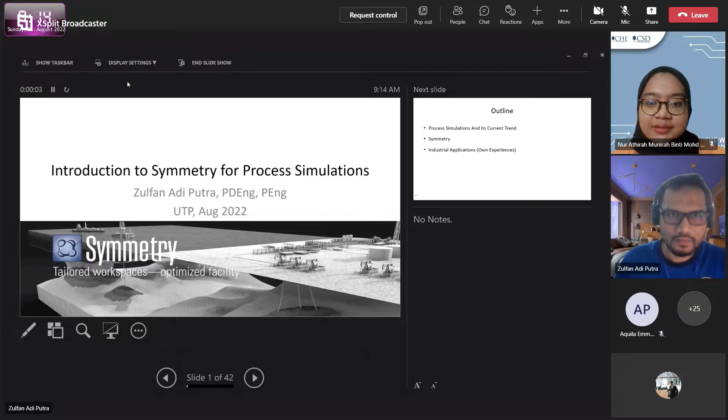Okay, so we'll discuss symmetry first. Could you please remind me, are you all final year students or third year, which one? I think they are from various years. Oh, okay, well, no problem, let's just get started. Now, what time is it now? Okay, 15 minutes.

Before we go into how to use symmetry, I'll go briefly on some things I would like to share about symmetry itself. We'll discuss process simulation - what is this, what is process simulation basically? Because some of you may already know that, some of you may not, so let's just set some ground basics.

Then I will share something about what symmetry is, and my own experience using symmetry for industrial applications. Mind you, I've used symmetry for the last 6 years or so, since 2016. There are many other things I did before that year, when it involved simulation, modeling, or optimization - I used different software. So some of those applications I will not be sharing here, because here we are discussing symmetry, not process simulation in general.

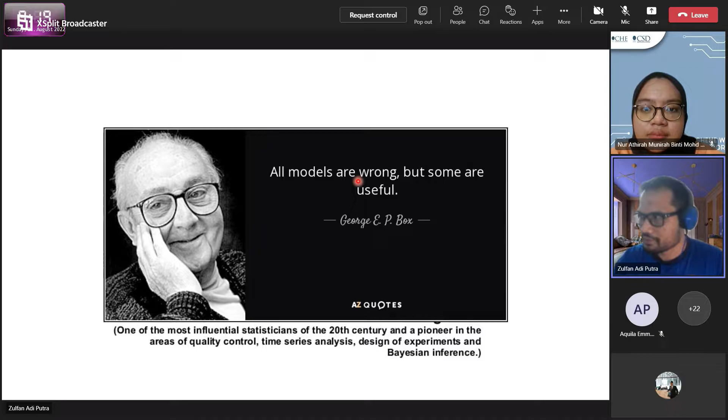So why do we do process simulation? There are several things why I do process simulation — the most common ones for you and also for us chemical engineers. Number one, we use the process modeling or process simulation software to calculate mass and energy balance.

So from this mass and energy balance, we can do all sorts of things. Number one, primarily, is to do equipment sizing. So we size the equipment. From that mass and energy balance, we have several cases, and then we can size how big is the pump, how big is the exchanger, how big is the vessels and reactors, and so on and so forth.

And then typically, once we have that mass and energy balance model, we can use that model to find some root cause of a problem. Say, for example, you're giving this input as much as you can, but you don't get the output as expected. From that model, you make the model of your plant, and you can see why it's not behaving as expected. Then maybe you can see there are some losses somewhere, which you can quickly identify once you have the mass and energy balance model. If you don't, you have to work really hard to walk around the plant, ask the operators, get some data, and then find if there are any losses.

But that's one thing we can use the process simulation model for. And once we know that, obviously we can then improve the performance — we can increase the yield, we can minimize the losses by tweaking some of the valves on the plant. And how do we know that? We could see that by doing some sensitivity analysis on the model itself. So say, for example, I increase the flow rate, I increase the duty, or reduce some pressure, and then you might see something.

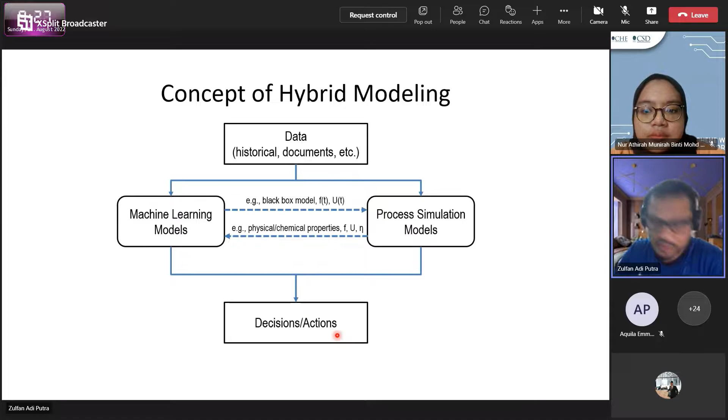This is what I mentioned. So this is what's in the hybrid model, unit operations capable of handling neural network models, and that one as well. It is integrated with typical first principle models, like we have a flash, pumps, heat exchangers, and so on and so forth.

Now Symmetry. What is Symmetry? If you know HYSYS, so Hyprotech, same founding fathers with Symmetry, but Symmetry is using Microsoft Visio. So if you know how to use HYSYS, you could then know how to use Symmetry without knowing it. It's just that visually it looks more beautiful because it has this Visio and stuff.

It's now under Schlumberger, so this product is now streamlined with the other Schlumberger products. So you can then make a model from your reservoir to the well, to the topside pressure, topside facilities, and then up to your onshore facilities, up until the flare. So you could basically model the whole facility from the ground up until you dispose it.

So you can do so theoretically. Practically that's a different story. And then they have more elaborate thermodynamic models compared to HYSYS, because HYSYS stopped thermodynamic modeling development when they were bought by AspenTech. Symmetry is continuously updated, so you could model more and more systems using Symmetry as opposed to HYSYS.

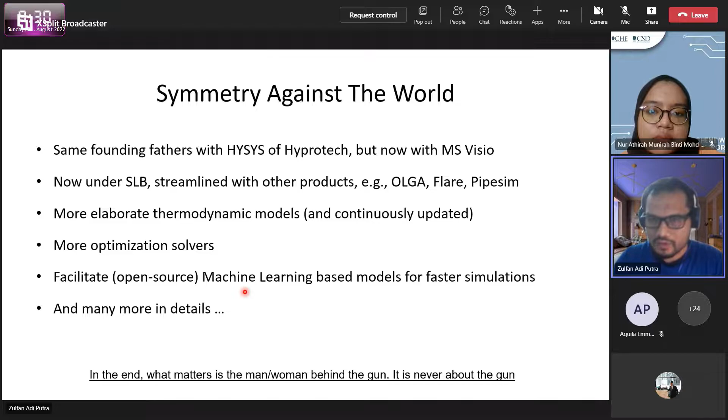So what I like and don't like, there are a few things. I'll go quickly on this. Thermodynamics, as I mentioned, in Visio, open platform for machine learning models, and robust neural network deployment related to the machine learning model. There's a flowsheet convergence window so we can prioritize the recycling loop. The user interface is clean and straightforward, and you can use the same flowsheet to make a steady state model and also a dynamic model, just like HYSYS.

But we cannot do so in Aspen Plus. In Aspen Plus, we have to export the steady state model, and then open that exported steady state model in Aspen Dynamics, and then fine tune it. So it's not that easy a transition. There are a lot of optimization solvers, many options for pressure drop correlations as well. Then controllers can be easily configured, just like HYSYS.

But what I don't like about this is that, like I mentioned, I like Aspen Plus thermodynamic models much more. There's no shortcut distillation unit - I think in Aspen HYSYS or Aspen Plus you have the shortcut distillation unit, but not in Symmetry. And the development of your own unit operation is not as straightforward as in Aspen Custom Modeler. We can make our own operating unit in Symmetry, but it's not as straightforward as Aspen Custom Modeler in Aspen Plus.

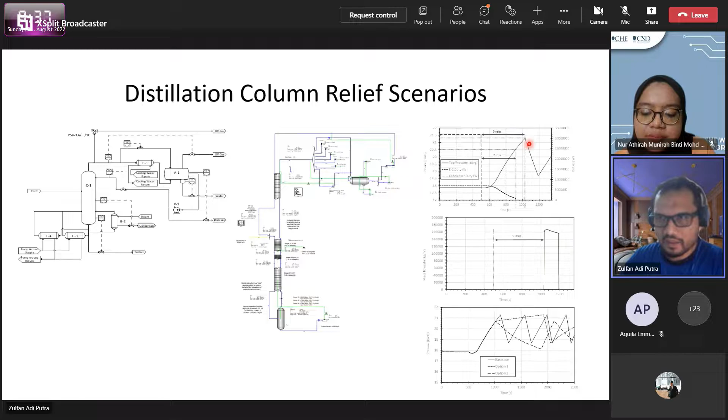Okay. Now I'll show you some stuff. This one, the rest is about the same, but I would like to show you this one.

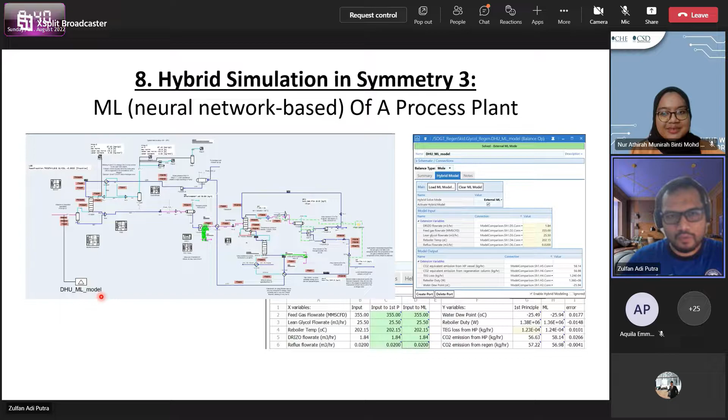Okay. I'll skip this. Yeah.

Now we have two hours or more, and I will leave another half an hour for questions and answers. Do you all have access to Symmetry?

Are you opening Symmetry now? Are you opening Symmetry or are you not opening Symmetry? No question. No, sorry, no question. No answer. Hello, hello.

You have your Symmetry now. Okay, at least I have one. You open your Symmetry, yeah, like this, and then you will see a window like this, right? Okay. Yes or no? Yes. So I assume it's yes.

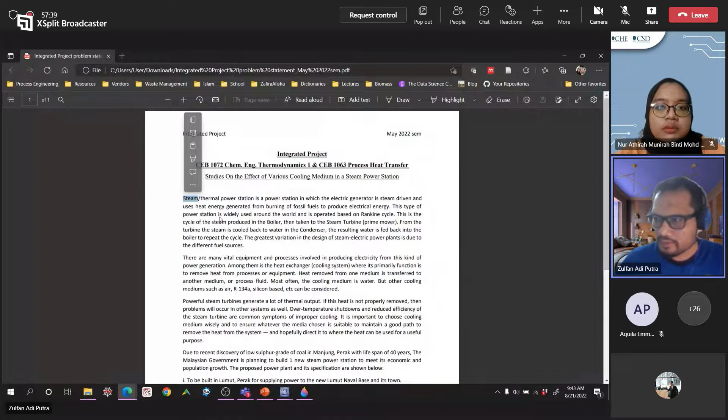From this thermodynamic model, I received from your colleague Li Jing a case about a cooling medium steam power station. So we have steam, which is basically water. Is there any other stuff? No, so we'll do water, air, and R134A. Let's add water, since this is a steam cycle.

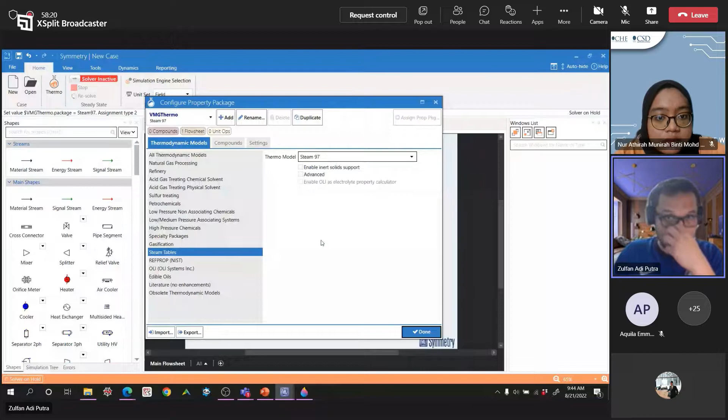In this particular case, your thermodynamic model is the thermodynamic model of water, so you could use steam tables. Pick the latest one, the Steam 97, and then the compound is basically water.

You could type and press the button once, then press it again and it will be selected. Or you could type water and double click to highlight it, then you get it selected - double click, one click, and you get water in it.

The name of your thermodynamic model is then VMG thermo, so you could name it like 'your model.' So your model is then using the Steam 97 dynamic model. Up until here, is it clear? Can you follow? Yes, good, and then you click done.

If you don't want to talk, it's also fine. Just say yes or no.

Now we have the thermodynamic model, and we know how to select the components we need. The next step is the unit sets - depending on which unit system you're familiar with. Here we're more familiar with SI units, so that's the units we're going to use.

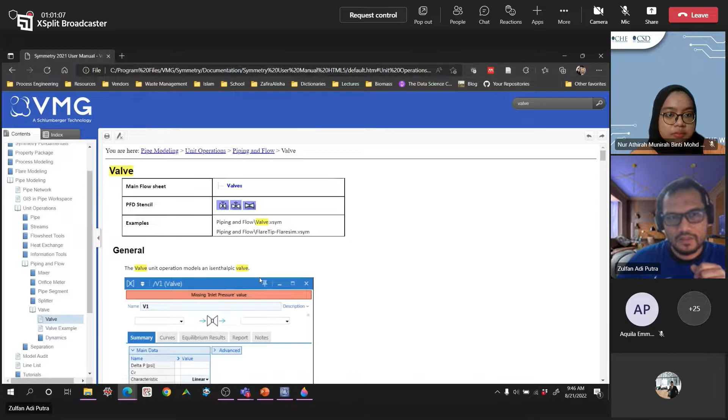You can search for things - fundamentals, process modeling, flare, and so on. For example, if you want to find something like a valve, there are 99 results. You can go to valve - when you click it, you find it under the valve directory, under piping and flow, under unit operation, and pipe modeling as well. You can see general information about the valve and an example on how to use it.

Here, if you want to go for dynamic modeling of that particular valve - the same way you can search for other stuff. I'm showing you how to do that so at least you can go ahead and find your way around this.

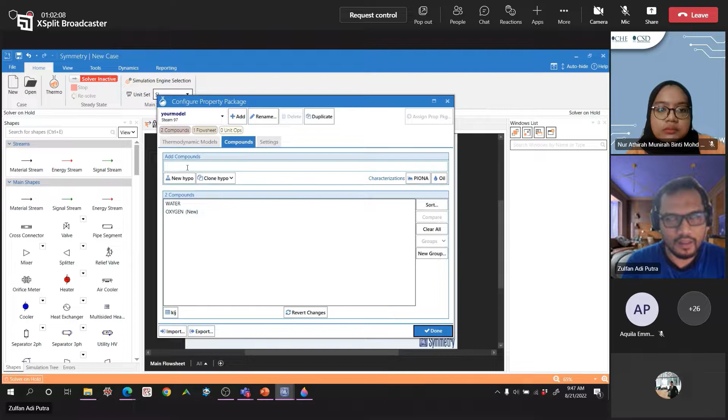That's all done for thermodynamics - one more thing. Say, for example, you miss one component - how do you get back? You can simply click on this thermo and you'll see the same window with your water. If you want to add some air - we have oxygen and things like that. Then you click done.

Say, for example, you make a material stream. Since this is Visio basically, it's just a matter of drag and drop, like you use Visio normally. If it's yellow and dotted, that means it's not solved - we need some more information. If you hover over it and then double click, you can see.

So my laptop is very slow.

Okay, so now here you can name it as you want, like stream, my stream. So you can name it, and then here we have the composition. In this case, maybe we want to have water only. The window pops up, and you can see it's small on composition, right? Then I simply enter, and then you click OK.

For example, you have another 0.01 over here, and then 0.03 over there, and you can see that this is above 1. So it's not possible to have a total of more than 100%. In this case, if you say well, this is also true, you could do normalize. It will then be normalized according to these numbers, but the total will be 100%. So if you click normalize, something like that, instead of 1 you have water like 0.96, oxygen 0.0096, and nitrogen is 0.0288, something like that.

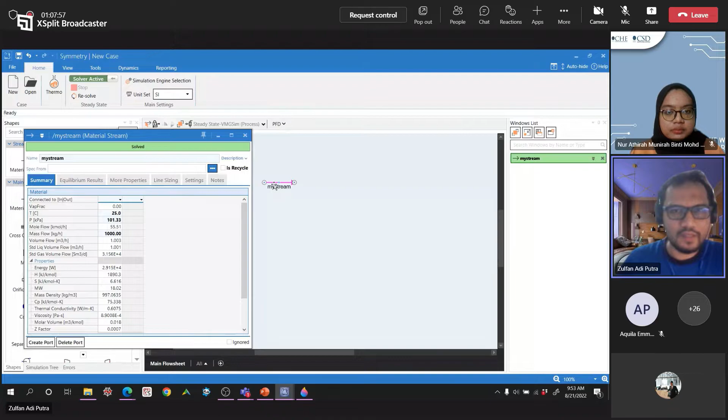And then you can see that the color changes - it was blue, now it's purple. What it means is you can go to tools, then settings, then Visio PFD, and you can see here: if it's purple, it's a liquid, which is what we have now. And if it's blue, what we had before, we have a liquid and a gas, so it's a mixed phase. If it's blue, and if we have full vapor, we have a teal color like this. You could change it, but I will just leave it like that. It's not something to memorize, but it gives you an indication that the phase may change already. So it is a help in this regard.

Do you have any questions so far? No? Okay, if you don't, then fine.

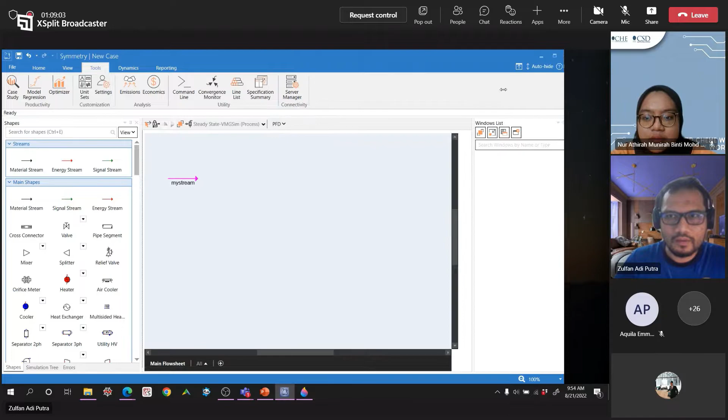So I will put it here. Just close this, I'll show you. Let's see if we can do this quickly. I'll put it side by side so that you can see it and I can see it. So small. Okay, can I do this? Okay, now.

Yeah, so this steam turbine stuff, let's read this together. The electric generator is steam driven, using heat energy generated from burning fossil fuels to produce electrical energy. So it's very inefficient from that perspective. This type of power station is widely used around the world simply because at the time people didn't know any better, and nowadays people know something better, but because it's been historically done that way, people are reluctant to change. Nonetheless, it's operated based on the Rankine cycle.

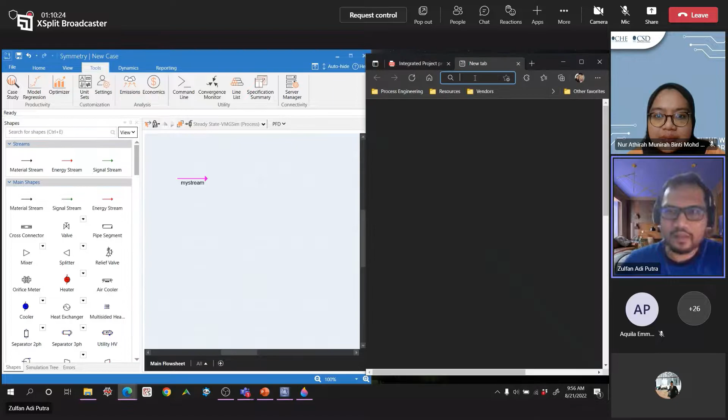So what is the Rankine cycle? If you don't know, you can Google this Rankine cycle. Or if anybody in the audience knows what the Rankine cycle is...

So Rankine cycle is... where's that stuff? This one. So we have, which one is the easier one - Rankine cycle? Oh, find picture. Nah, this one. So you have this.

So you have a boiler, and you're burning fossil fuel, right? You burn fossil fuels, and from that burning, you make your steam. So steam is produced in the boiler - you have a boiler, you're using fossil fuels in it, and you burn it.

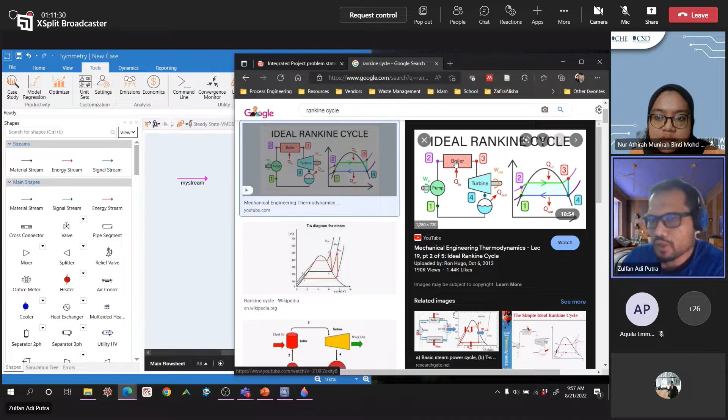The question is, well, we could model this. We could model the fossil fuel, the amount. Let's just do that for the sake of introduction. So now we have fossil fuels - what kind are you using? It's not really known, but nonetheless, let's just use...

Methane gas. In that methane gas, say for example, we forgot to put methane, right? So we add methane - click once, so you have your methane. We burn methane, and when we burn methane, we also need oxygen. We have oxygen, and then we have water, and we also need CO2. So now you have your methane, for example - your natural gas - and assume it's pure methane.

It's ambient, maybe just simply slightly above atmospheric, so you can push it towards the burner. So let's make it 2 bar, and because the unit is in kilopascal, if you put 2 bar you want to change it - you can put 200 kilopascal, or simply press space, and you'll have all kinds of units you can select from. So 2 bar is 200 kilopascal. You can also make it, I don't know, 1000 - just put a nice number.

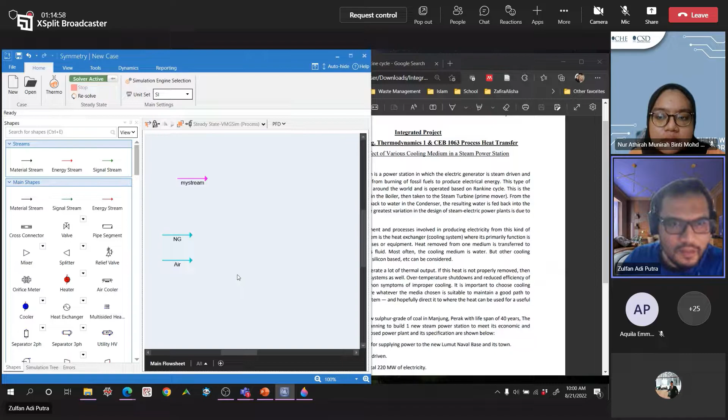Okay, so now you have air, you have nitrogen, you have natural gas. So you burn it because you need to get that heat from the burner. So how to do that? Obviously, number one, you have to mix them, right? You cannot react something because it's oxidation reactions. Just drag and drop the mixer, connect it over here, and this one over there. And then you can see it was gray - now it's dark black.

It means it is solved already. Why is it solved? Because we haven't specified anything. It's simply because there is one degree of freedom for this mixer, and it just calculates the outlet pressure as the lowest between the inlets. So we have two inlets, air and natural gas.

The lowest pressure of the two becomes the pressure here. So this is zero. In zero is the air, which is air. This is quite inconsistent, which is also what I don't like about Symmetry, because air is on top, air is on the very left, and I'd expect air also on top, not the bottom, but nonetheless it is there. So we have natural gas, and the second inlet, both are 200 kilopascals.

So this is also 200 kilopascals, and then they are mixed together. It's simply mass balancing. You can see the mass is just 1,000 plus 1,000 equals 2,000, and then the energy will also be calculated accordingly.

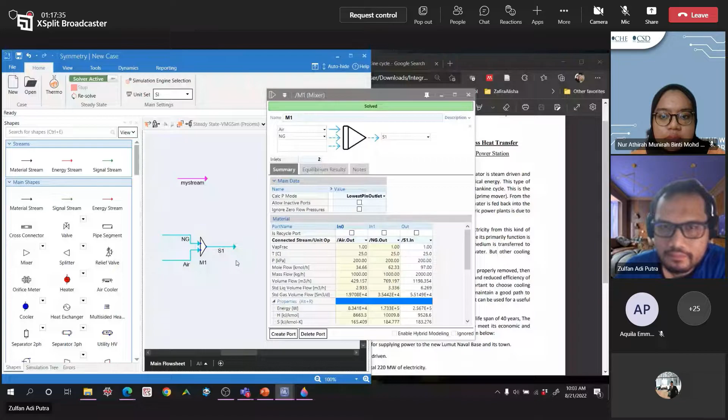So now we have the mixed air, we mixed the air and the natural gas, and now we simply burn it. That burning is an oxidation reaction, right? So if we assume it's a complete combustion, because what we care more about is the heat we're going to extract from it.

So we can go to reactor. Reactor is, yeah, you can simply get a conversion reactor like that, and then connect it there, and double click on that. From here we have to define, so it's a conversion reactor, we have to define the reaction first.

So this is oxidation reaction. Now we can go to the reaction tab and click add or edit, and then you can name it oxidation reaction. And then you can say it's methane, right? So methane is -1. Methane has 1 carbon, so it means the carbon dioxide will also be 1. Could also be 1. And then we burn it with O2, so CH4 plus O2 becomes CO2 plus H2O.

So how much is that DH? How much is DH?

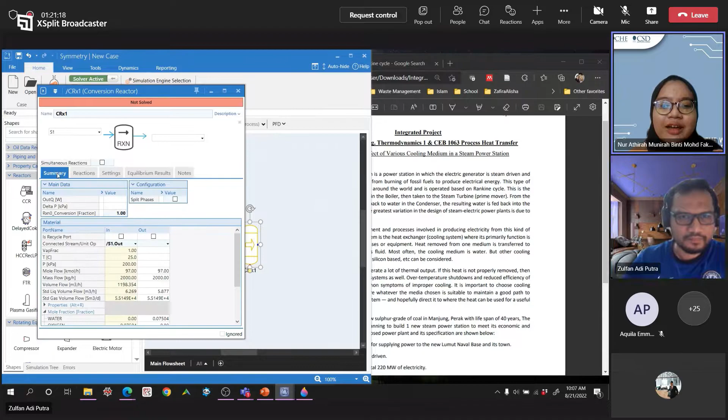Can you open the reaction tab again? So how do we decide the base component?

Is it something like the limiting reactant? How do you decide what's being reacted? The base component, so the reactant. But I think we have two reactants, right? Methane and also oxygen. So in this case, what exactly do you want to do with these reactions?

You want to, because oxygen is an oxidizer, so it will oxidize something. But you cannot methanize oxygen, there is no such thing. So if you oxidize methane, that means that methane is a base component. Mathematically speaking, you could then use oxygen as a base component. It doesn't really matter as long as it is one of the reactants. You could do so, but then from the physical standpoint...

Something is the one that is being limited, so that's the limited thing, and that is then the methane. Methane is being oxidized, that means methane is then the base component.

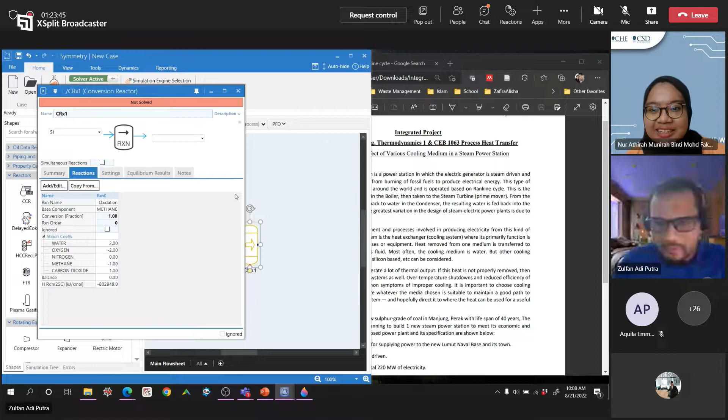I think your connection is not quite stable because I can't hear you. Hello? Is it okay now? Hello, I think it's okay now. Hello? Yes. Can you hear me now? Yes, I can hear you now. Can you not? Hello, hello. Hello, can you hear me? Yeah. You cannot hear me? Yes, I can hear you now. I will disconnect and connect again.

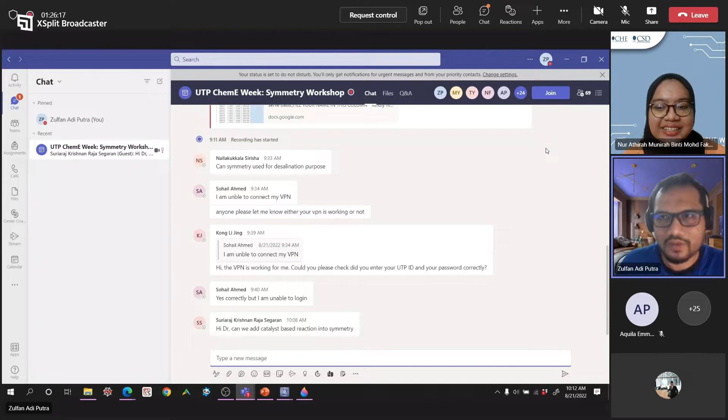In this particular case, for example, in combustion reactions or other reactions, there are several things to consider. I think that stems from the understanding of reaction engineering, basically it's not about the tool. So now let's see if I can write this.

So now you have component A, and then reactions, and A becomes B. And you can say, well, I have a catalyst over here, and during this period of the catalytic reaction, I make B from A.

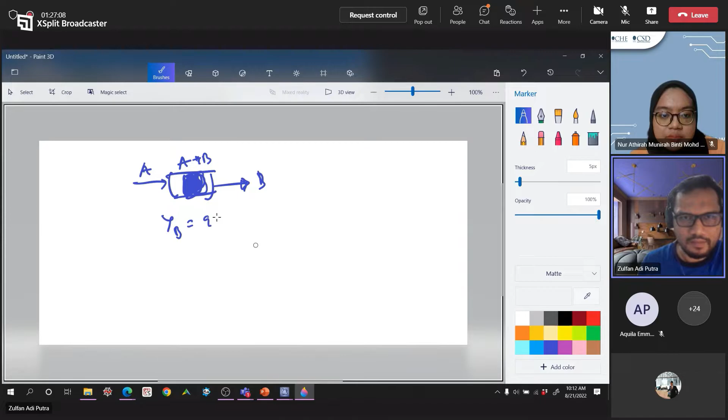So question number one is, how much B is being produced? If you know that the yield of B is 90%, that means you can simply calculate B, right? So you get your B, B is done.

And then you can come back with your reaction engineering class to say, okay, if I want to have B at 90%, I know this information from the literature, and I know how much is the flow rate of this guy, and then you can calculate how much is the volume. If you know the volume, you can calculate it, and obviously if you know the volumetric flow rate.

And the density of this guy, or you can have a mixture density, then you can simply calculate the diameter of the reactor. From these simple calculations, you know the volume, you know the length, and you know the diameter. So that's how you get your insights on the catalyst, the size of your catalytic reactor.

So that's number one. Number two is, if you don't know the yield of B, but you do have a kinetic expression...

So you have reactions of A, for example, it's minus K and then C_A to the power of 1, 2, or 3, up to you. Just make it 1 in this case to make it easier. So in this particular case you can say, I want to vary this, to have an automatic calculation.

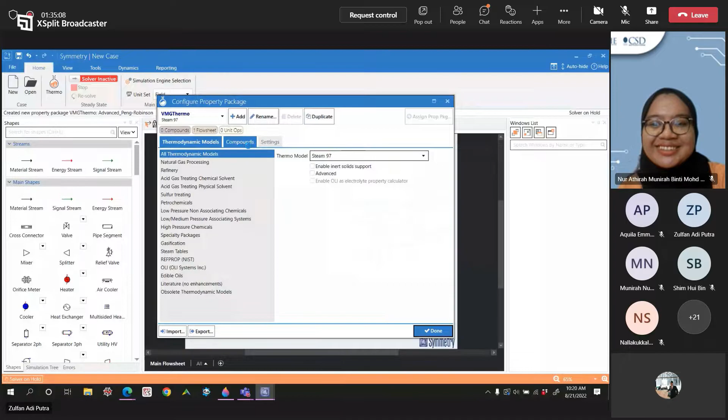Let's use this stream: water, and then you can use semicolon to select some components simultaneously. You have oxygen, methane, and CO2. So you put semicolon in between. After that, you have everything together, and you can just press once, and everything will be selected, and press another, and they're all there. Done. It's important to save your work every now and then.

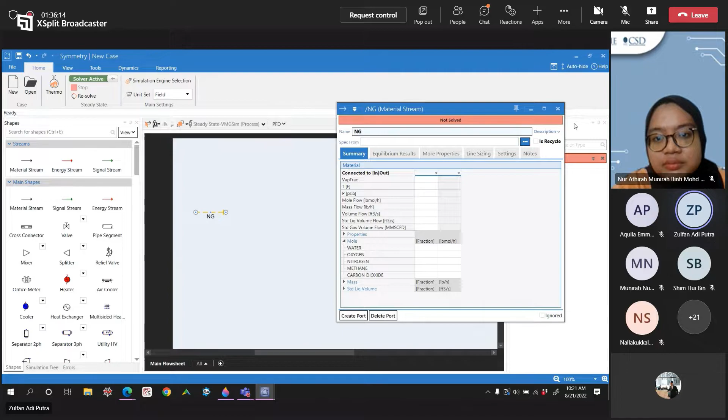So now we have natural gas. Is there any questions while I'm doing this? Or was it clear previously? So I have to make it in the... was it clear or not clear? So we have to make it.

For me, it's clear. Probably. What does it mean by probably?

Clear, and then the 1000. And then we mix them, obviously, because we want to burn them. So it's automatically solved like it was before. Okay, and then we put it there, and it goes to the reactor. Where was it? An equilibrium reactor.

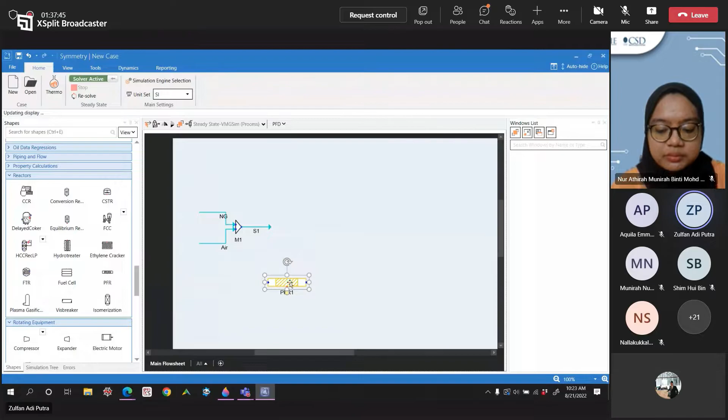If you want to use this PFR, you can, if you have the kinetics, like I explained before. If you have the kinetics, you can use this PFR, but again you need to decide on the length and diameter, and then it will calculate for you what the outlet conditions are. Once you specify the reactions, all of this kinetic data will be available.

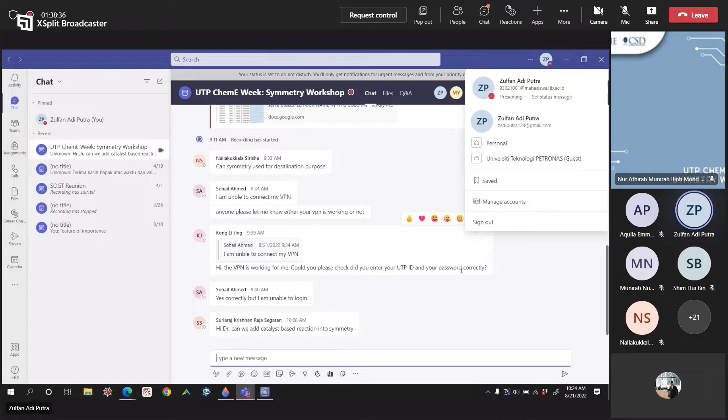Now it's empty because we haven't specified anything. But for this simple conversion reactor - for the questionnaire, the person who asked this, what's her name? Suriaraj. If you have a specific example on this, just let me know. You can write down the kinetics in the chat, and I can then show you how to do it. Just find that particular problem you're concerned with, and let's do it.

So connect it over there, and then we have reactions first: methane is -1, carbon dioxide is also 1, and then water is 2.

So conversion is 100%, and the base component is methane. So we've done the reaction. And we know that conversion is 100%, or we make sure that it's going to be 100%.

Now once we've specified the pressure drop, we need to specify what the state of the reactor is. This reaction is an oxidation reaction, which means it's an exothermic reaction, so it will release heat. That's from the reaction standpoint, but from the reactor standpoint, are we going to operate it isothermically?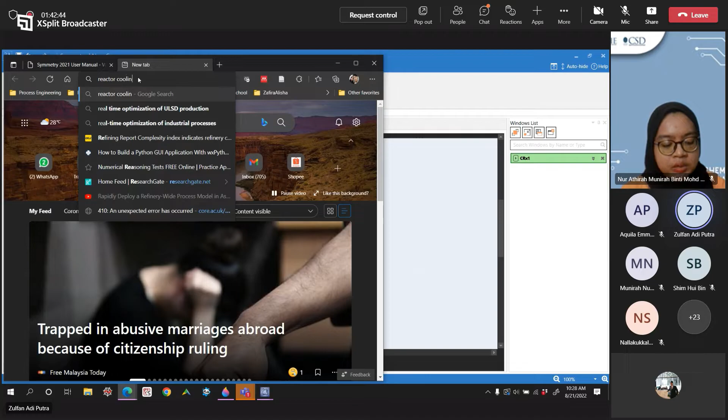So typically we have a jacketed system here, either a jacket or a coil around it. The amount of steam that we could create, we have to calculate the heat enthalpy of that particular steam at that pressure, and then use this amount of energy. Then you can calculate how much steam you can make.

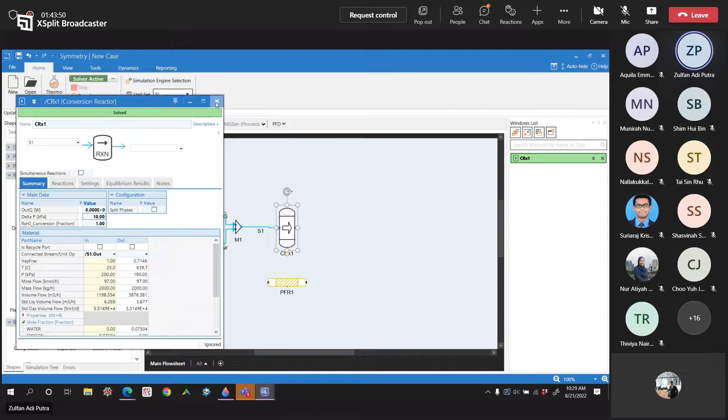For now, just keep it adiabatic. Just keep it adiabatic. And this is it, for the time being. And I'll show you, because we're going to need that heat. That heat is going to be used.

Remember this task - steam is then being produced. Sorry, the heat is not being used, but that particular heat is being used to produce the steam. You could do it 2 ways - what I said before, which is what type of steam do you want to produce? Are you going to produce a higher pressure steam or lower pressure steam? Say, for example, you want to make steam using a steam table, so if you go to the steam table...

So steam table images, like that, like this. So steam table, this is steam table block.

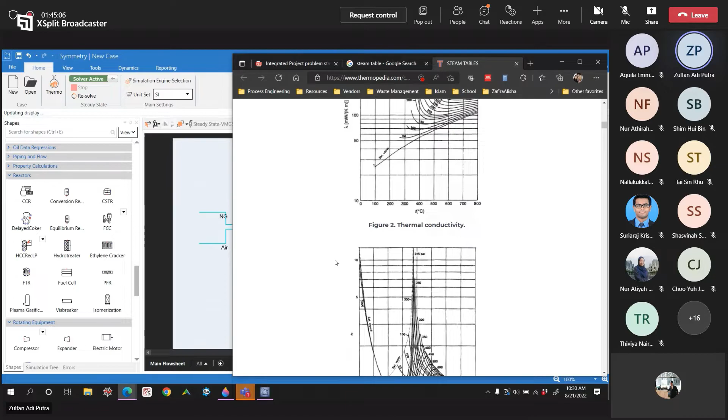So now, say for example, pressure, temperature, right? So what's the unit of P? Oh, bar, so you have bar. So for example, you have like 1 bar, 1 atmosphere over here. You have like 100 degrees C of saturated water, which is the boiling temperature of the water.

Say for example, you have this guy. Close this. So this guy, it can create up until 600 degrees C. You can see that, yeah, up until 600 degrees C.

So you could then have, depending on what you want. I'll have to put that Rankine cycle again, because it has something to do with this. It will have everything to do with this Rankine cycle.

So you can see, because it will then create steam, and this steam is going to be flowing through a turbine. The higher the pressure of the steam that you make, the more power that you could generate. So it depends on the pressure and the amount of volume, the amount of steam that you are generating.

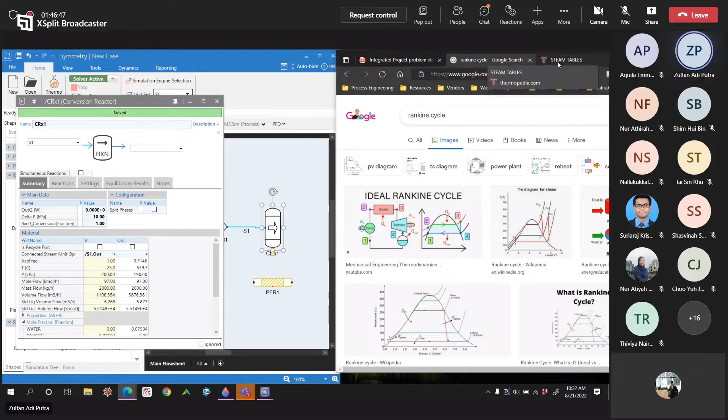But since we have a fixed amount of energy, you can then play around with what is the pressure, what is the flow rate, in such a way that you can find how much is then the electricity. It's something that you have to find.

So let's assume that we make like a 4 bar steam for the time being. So in this case, this is one approach. What I mentioned is that you make this like a 160 degrees C.

And then the steam that you can create is, if you put like 4 bars, that means you need to have a temperature of about 144 something. So maybe then you can have a nice driving force in temperature, so 160 is good enough. Okay, so then you can make like about 4 bar steam.

And then this is the amount of energy that you are releasing. In this regard, if you put this energy, I think you can put that energy. No, no, here. No, so it doesn't. It's not being used somehow.

Nonetheless, you know what the energy is, so we can then use what we call process calculator. So this process calculator is our control panel, so to say. So steam 4 bar, and temperature is 4 bar, and temperature is 140 something, 144 about.

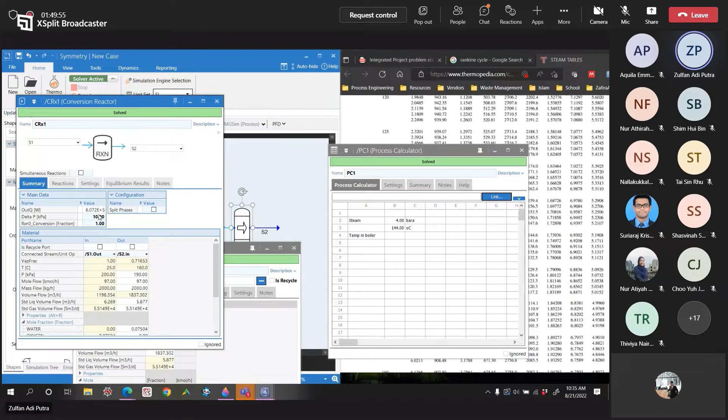See, so this is now being calculated, and you can see we can have the 160 over here, and then the energy is over there. Then we can say, okay, now I copy connections, and then we put it over here and paste connections. So it is being connected, okay.

So for example, if I change this to 155, this is then changed accordingly, and the amount of energy released is this much. Copy connections. So this is, yeah, it's very ugly.

Watts. So how much is this? Divided by 1E6, that's in megawatts. 0.6 megawatt.

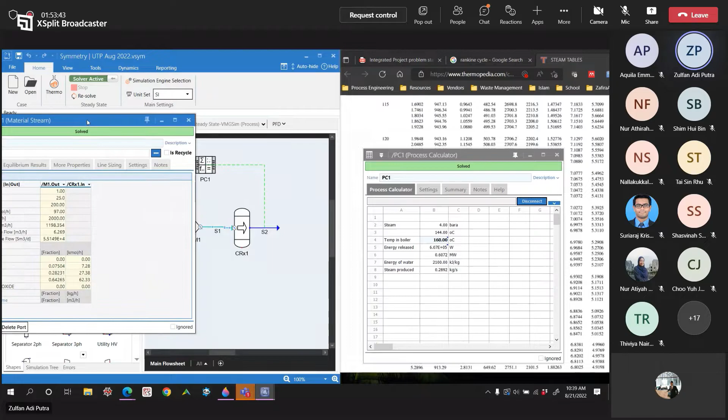Another way is, for example, I'll make another reactor, just to give you an idea. We can also clone this, and then they are connected. This stream, we create ports, and it will then copy either the in or out port.

So here, out, I just copy the out ports, which is then on here. So I copy that, and then I copy this as well. Copy, and I paste it over here. Paste. So let's see if it works. It should work typically. See, all of the data are there, and the directions are also there.

And then we need to connect this to the other S1. So we click the drop down over here, and then S1 out. See, S1 out underscore 1. So this is then a copy of this S1 stream, and then you have this connected. So all of this input is automatically connected.

And then, say for example, if I want to make this adiabatic, so I contain the heat, that's the second way. So it will then be doing it that way. And then we have the outlet stream. And this outlet stream, we need to use that energy, right? Because this outlet stream is 639 degrees C, 639 degrees C.

So I want to use that energy to create the steam. In that sense, we put a cooler in it. And then that cooler is, oh, I don't need to, I can directly put a heat exchanger. So heat exchanger, and then I have to have a stream, right? A water stream, because I want to make it steam.

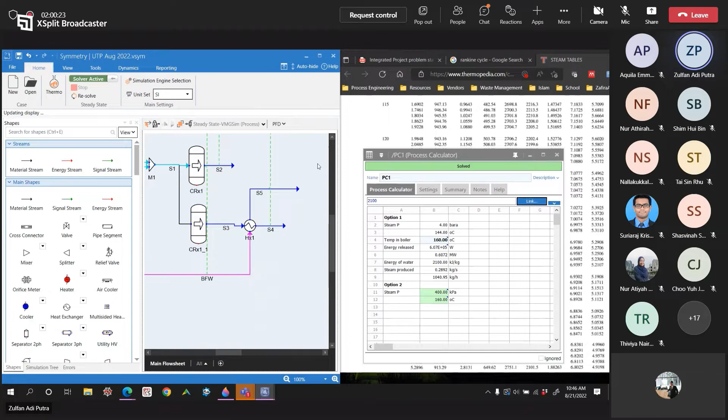So this is then your steam, yeah, so this is then your steam. So I've now shown you two ways of creating steam. Steam is steam produced, and it's basically your input. This guy is basically the input, but nonetheless...

Just copy this, for the sake of completeness, this is then temperature. And then the vapor fractions, somehow it is not fully vaporized yet, so we need more energy, or we can then use a lower steam flow rate. So in this particular case...

We can, so I'll make it. Okay, steam. So we need to make sure that this is 100%. So steam fractions, steam wetness of fraction. Okay, something that we can connect over here. So we want to make it like a dry steam.

So what we have calculated above with this approach, we don't know how much, we don't know whether this steam is then dry or not. But with this second approach, we know that the steam is wet. So what we could do is either put more natural gas to give us more heat, or reduce the boiler feed water to increase this. So which way is up to you.

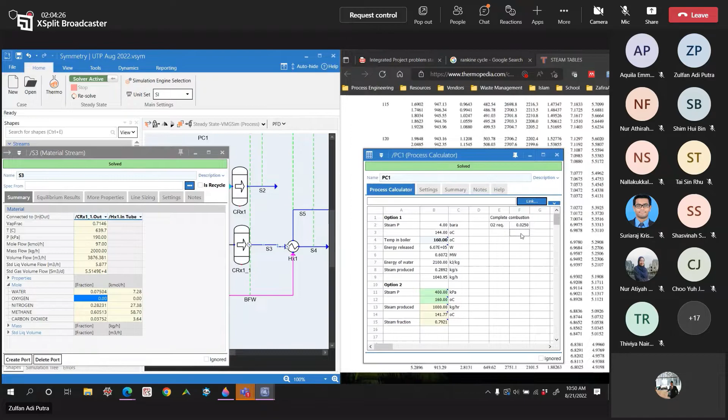Okay. Doesn't want to be copied. Oh, another expansion. Copy. This is calculated. So that's the error. Is this guy?

Okay, so in this case we want to minimize this. We minimize it in such a way that we increase the air flow rate. If we minimize this, it means this guy becomes closer and closer to 2.5%. So how do we do that? We either make it manual like this, so I increase it now, to 2000.

We have the temperature cross in here, in this heat exchanger, so that's something we have to be careful about. But we still need to, we'll look into this later on. But we're not getting any better, so we could also make it like 10,000. We're also not getting any better.

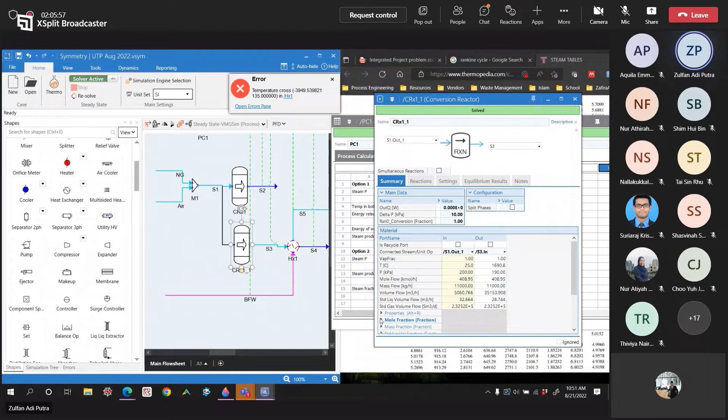In this reactor, indeed we will have to reduce the methane. We have a reduction in the methane, it was 58 something, now it's 25. So we are getting somewhere.

So we can set up a controller to adjust it automatically. I want this error to become 0. I copy connections, put it over here. So I want to have this error become 0. The target is obviously 0. Then what do I manipulate?

What I manipulate is the flow rate of air. So in this case, copy connections and put it over there. Then it means is the step size, so you can put like, I don't know. Now the target is 0.05, so it's not yet.

It's 1.9, so it's less than 2.5%. So you want to increase this a little bit more. I don't know, maybe you can increase the maximum error to become like either one of these. So maximum absolute error I increase, I reduce the absolute error, so that will create this.

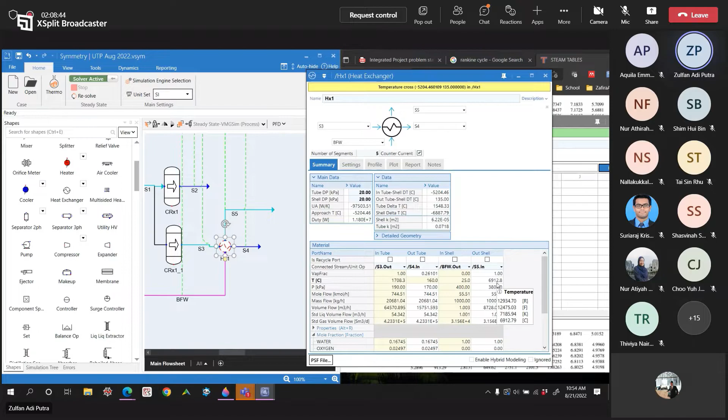The adiabatic temperature rise of this stream is about 1700. It was 600, now 1700, much higher. We want to reduce it to 160 degrees C. By doing so, we are increasing, we are using steam, which is then 1000. Because we're increasing the amount of energy, that means the flow rate of water is too small, and because it's too small, its temperature goes to thousands of degrees C, which is not correct.

So we could do the same way as in this case. We could also do that. Or, yeah, this one we have to be very careful with. We can increase the flow rate of steam in this regard.

So, I can increase this to, for example, increase the energy from 1,000, the natural gas. Sorry, how much was it? Don't remember. I don't remember now, it's up to 11 megawatts. So we increase it like maybe 10 times, maybe.

So now if I put like 10,000, what's going to happen? If it's like 10,000, it's still okay, but then the temperature of the steam is 881, which is too much. So we want to make it about, I don't know, maybe about 300 or something. So we increase it to 14,000. Now that's about correct, 14,000.

Yeah, it's about that number. So how do I know? You go to the steam table and figure out. So if the temperature of the steam is about 330 something, that means 300 something is somewhere here, 334, 335 is somewhere here. So your pressure is about 100 bar, 137 bar, 135 bar. So it's a very huge number already.

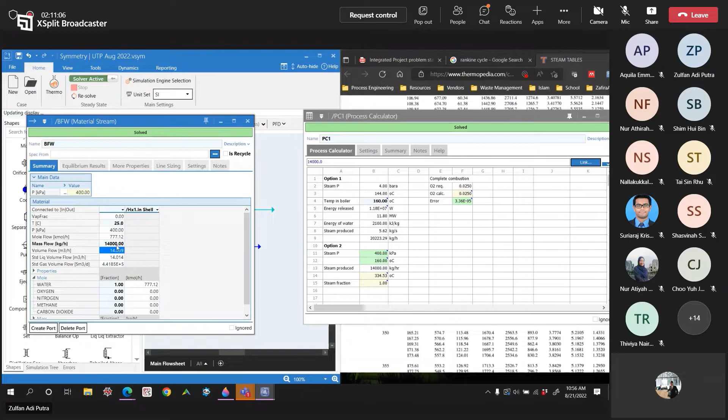give this as a controller. So I want to control this 14,000. In this case, I disconnect, and then connect this to the input, which is this guy. Copy connections, and then put it there. So this is as an input.

So now we have 400 kilopascal of pressure. So we could do so.

If I want to increase now, instead of 400 kilopascal, I want to have this also controlled. I will have to remove these connections, disconnect, and add somewhere here. So this is then 4 bars, times 100 kilopascal.

This is then connected to the stream.

So we are aiming about this 330 something degrees here. And then if we increase the pressure... one minute, how do I get the pressure? Connections. Oh, this is the pressure. So I put it in bar.

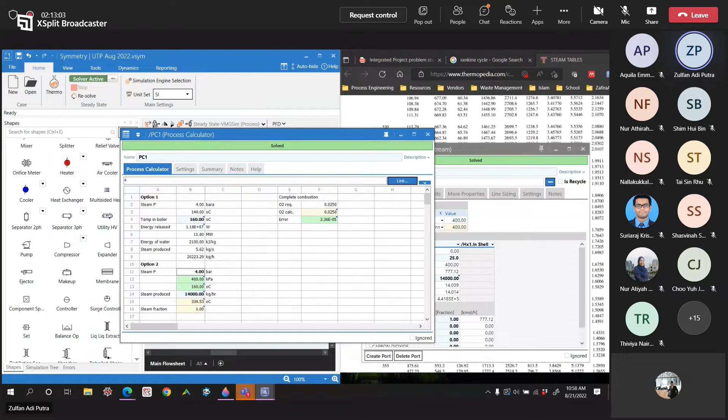So if I want to increase the pressure, for example in this case 137 bar, so if I want to make like 137 bar, the steam produces about 400 degrees C.

For the exchange, yeah. Where's this stuff? At 400 degrees C, I increase the steam pressure, 400 degrees C, and then the flow rate is that number. Yeah, it's about that.

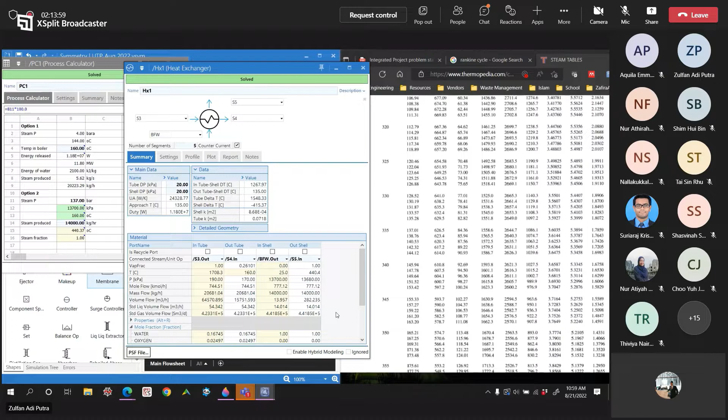Now, this is the amount of steam that we can produce, that we are producing with this setup. And then what do we do? Is there any questions? Because I'm now doing this myself, and I feel like I'm losing you, or you are losing me.

Right. Now, how do I make this? Let's leave it. Okay.

Now this may look complicated, but I'm just showing you all the possibilities. It's all up to you to pick which one you want to follow.

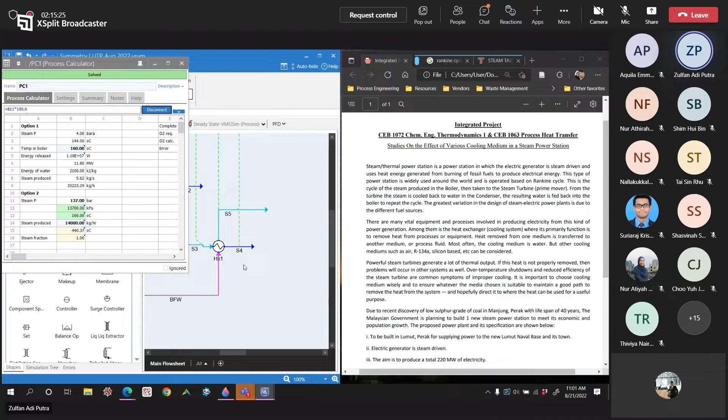One minute, so we have the steam. Now we have the steam, which is over here, and then this steam is then going to be sent to a steam turbine. There is the third way, where we make the cycle first and then work around it. So I will, okay, let's do so. Let's do so, let's see.

That's another way. So this is the first way, second way, and then there's the third way, which is the easiest one, which I just realized. So we now expand this to a turbine, right? This steam to a turbine.

So we expand it, and then we expand it to, like, for example, a condenser, where we have to have water or air. So in this particular case, we can then drop it down to atmospheric, for example, so we have atmospheric. Atmospheric is then, so let's put 150 kilopascal.

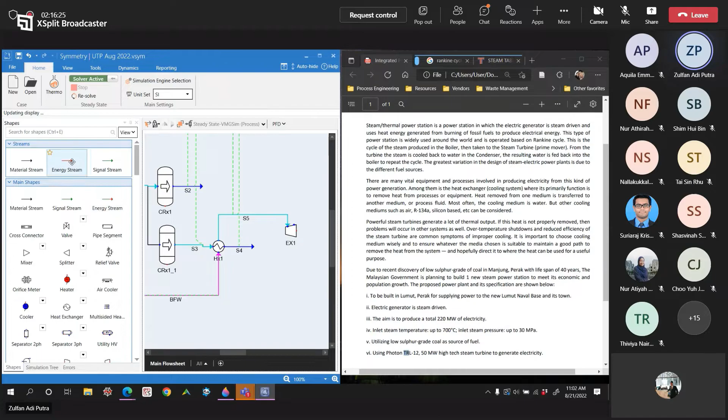And then the efficiency is about, let's put efficiency at 85%, and then you can see now we can see the energy. We can get the energy out, which in this particular case is 2.8 megawatt, right?

So I copied this, I copy the 2.8 megawatt, copy connections, and then put it. Where's that guy? Put it over here. Turbine efficiency.

0.85 megawatt, and then this is the efficiency is... yeah, I need to have, it's not that easy. I need to have like pressure out. Not nice, because these two, pressure out and turbine efficiency, is the input, so we need to make it copy. No, I'll do later.

Okay. And then we have now the stream.

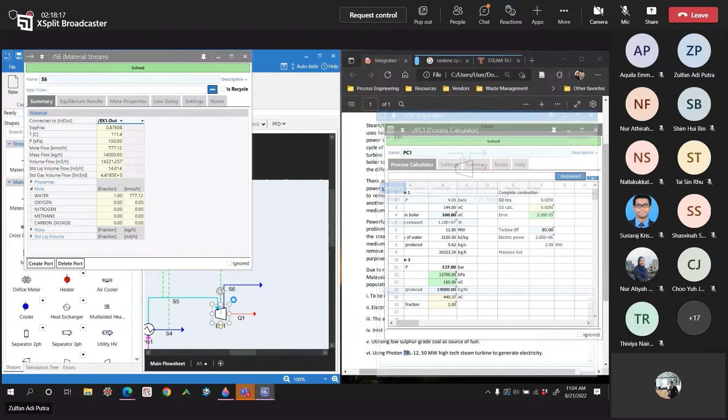Oh, 50 degrees C. So again, we use the same trick because we want to copy that number. So I delete that over here, put it over there, and then I copy this kilopascal. I increase this to 200.

So we would expect the electric power would then drop by a certain number. So it drops to 2.7 instead of 2.8. So we can play around, yeah. So if you have a much more efficient turbine, then we can have a higher or a lower efficiency.

So that is one way, and then now we have this turbine. So let's complete the cycle. What do we have next?

And then it's cooled back. So we have the turbine, so we have done this, we have done that, and then we are cooling it down. We're cooling it down. What's the temperature over here?

So to know this temperature over there, you can either hover over it or double click on that, or you can have a show PFD data sheet. One minute, yeah.

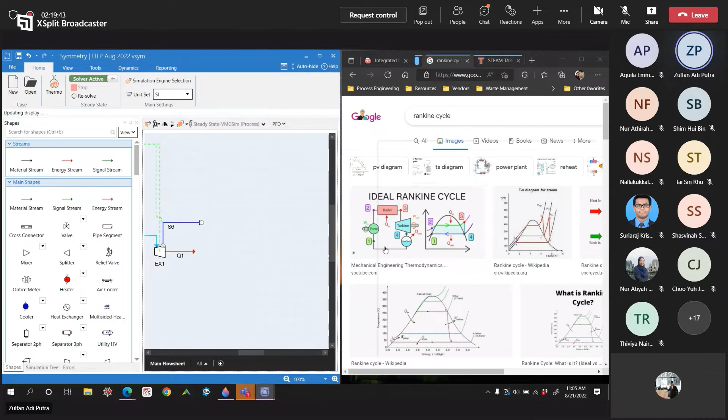For completeness, I don't want to have this. Put it over there. So mass flow temperature, yeah, I want to have no comma there. Now you have it, so temperature is about 111. So we are typically cooling it down with air or cooling water. So we cool it down to, for example, in this case, rotate that one to make it nice. So we cool it down to maybe 60 degrees C, right?

Pressure drop is 1.2, 0.3, 0.2, 0.2, 20 kilopascal. That one, and then you have your cooled stream. So it's purple, which means this purple is fully liquid.

And then once we cool it down, we pump it again, so we have a nice pump operating only at like 60 degrees C. And then they switch it the other way around, put it over there. And then the pump efficiency is about, I don't know, 70% maybe.

And then the outlet pressure, because now we want to have—that's the trick. So we want to have a pressure of about 137 bar. So we need to have 137 bar, 137 bar, that's one. So we are pressurizing it to 137 bars, and then we are connecting this to that guy.

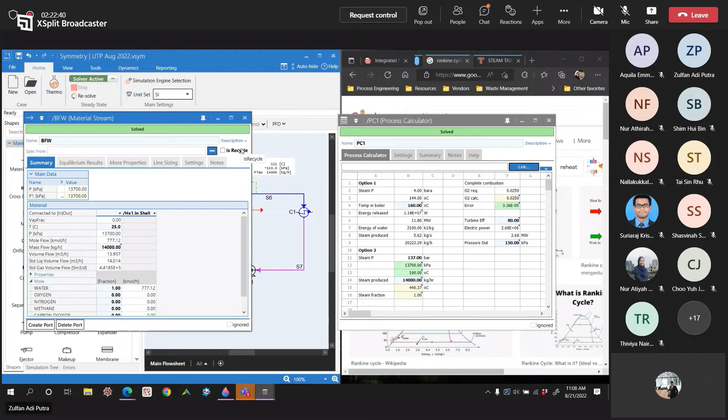This is what we have from this stream is simply steam pressure is that guy, which we can then copy later on. So this input is basically—so 137 is, we can take it from here, and then this is also there. So what we could do is, now, we can make a copy, or I'm not very sure if copying this would be that easy.

Now I will take this out. Okay, it is all locked, so I unlock this and then take that out, and then make this guy over there, and then okay, so now.

137 is okay, 137, so this is option 3. We make the cycle now. Steam pressure, just copy this guy.

This is bold. Okay. So I put over there these connections. So I have the pressure out, and then the steam produced is steam, 1,400, 14,000. It is.

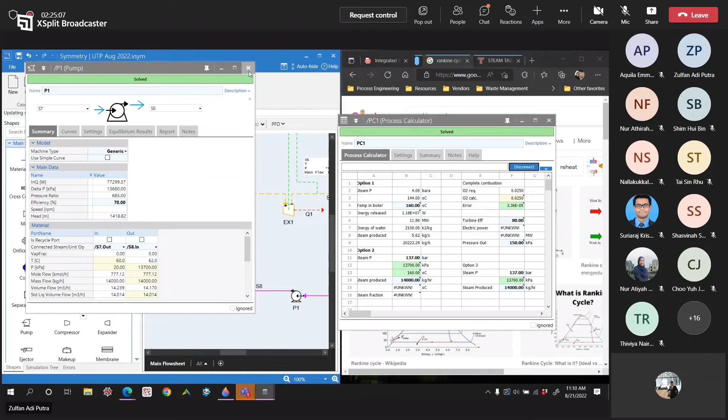Okay, now so now we have this stream, and this stream is going to be connected to that stream. So in Symmetry, if we do it right, we don't need to identify any recycle stream on this cycle if we do it right. So let's see if I do it right. Otherwise, we'll have to identify one of the streams as a recycle, which is most probably this stream.

So apparently we do it right. So in this particular case, where is that stuff? I want to have this Q, show—right, in unit is megawatt. So this is the amount of energy that we are using, and then this is the amount of energy that is being fed in. Copy that, add to PFD data sheets.

Add to PFD data sheets. Come on, add to PFD data sheets. Oh, we have it already. Sorry. Config. Delete. This is in megawatt as well.

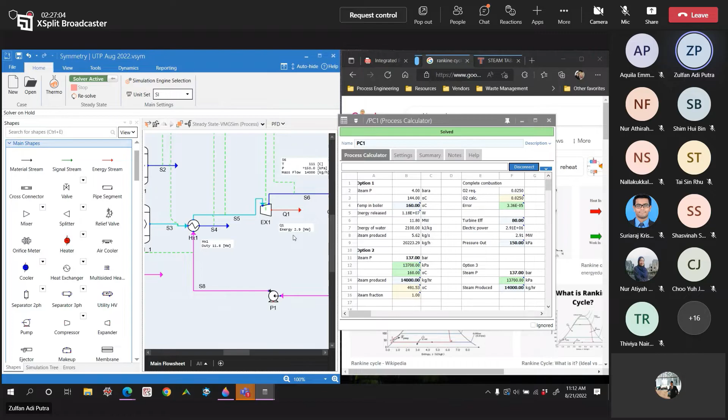So what you could do, because there are so many inefficiencies over here—we have inefficiencies in the pump, which is then 70%—so you could also extract this out. Extract this out: turbine efficiency, pump efficiency, down.

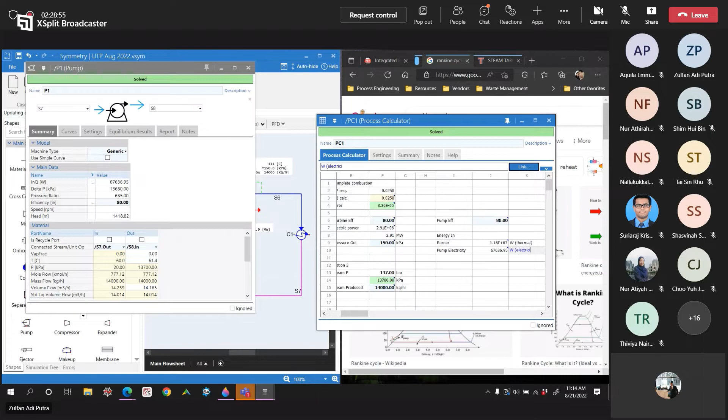So this is thermal energy. You have to make sure that this is thermal energy. And then we have also electricity from here. This is electricity, not thermal energy. So the watts, even though they are the same watts, they are completely different. What's electricity? Create thermal, to create electricity from thermal there is a huge efficiency loss as well.

But nonetheless, if we assume 100% efficiency in this case, we have a total energy in watt. So you can see the electricity is not that much compared to the burner. So energy out, of electricity produced, we have condenser.

So in this particular case, energy produced is this guy. You could copy this, copy connections. So you have watt as well. And then, sorry, disconnect. Copy, paste.

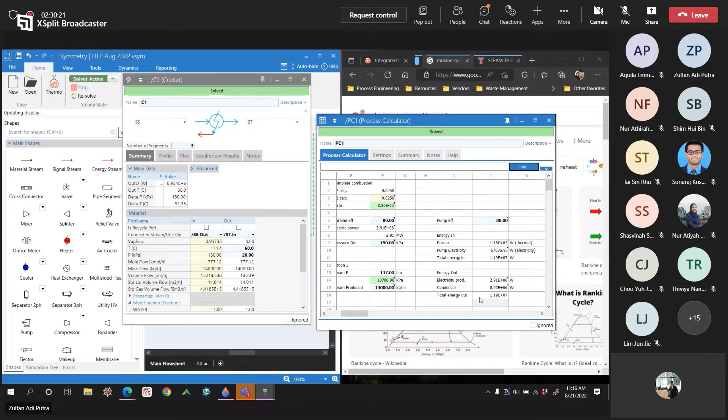And then this is then the condenser. Copy, paste. Okay, now you have a balance. So you have a balance system now. You have a balance system.

And then you can say, okay, now the efficiency of this cycle highly depends on how much, because the goal is to create electricity from the energy. So you can see much of this energy, 11.8 megawatt, it goes to this condenser. About 9 megawatt goes to the condenser.

So efficiency, the amount of energy that you produce divided by the amount of heat that you have in, or that one. Or maybe it could be both, because this is also energy that you need to pay for. So you could do this or that one, up to you. So in this case, compared to this, it's about 24%.

So now if I increase this to, if I put this to 130 bar, what happens? So you are reducing the efficiency of the Rankine cycle. So now you can play around. Now if I put like steam pressure, this is your efficiency. So you can make it now 130, sorry, this is 4.

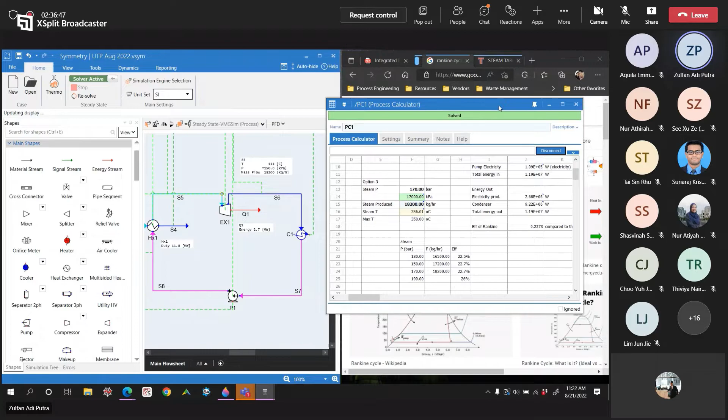So you could also play, for example, with the pressure out. This pressure out, but also dropping it down, and then you can see how much the efficiency can be increased. So I think with this, I'm not really sure if you can follow me, but nonetheless...

and it's all like blah blah blah, so blah blah blah.

The aim is to produce 220 megawatts. So now, if you know that you have to produce 220, how much is this? It's only like 2.7 megawatts. So that means you have to increase the size.

So what's the size? The size is then the amount, because all of this electricity is coming from the burning of the fuel. So that means you have to increase the amount of natural gas, or fossil fuel, that you need. But this is by no means green energy, because it's all fossil.

So the steam temperature can go up to 700 degrees C, while in my example it's about 350 degrees C maximum. The inlet steam pressure is about 30 megapascal, so about 300 bar. Then you have 170 bar. So now you can play around up to 700 degrees C and 300 bar.

Low sulfur grade coal as source of fuel. Even using coal, okay, it's even less green. It's dark black.

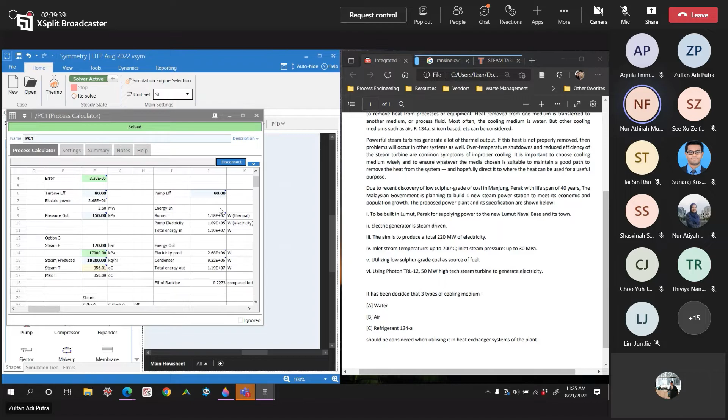Hello, Mr. Zulfan. Yeah, actually, we have one question from the beginning of the session, from Nalakula Sirisha. She asked whether the symmetry can be used for desalination purposes.

You can do it with everything that you can think of. Okay, because basically it's all tools. The most important thing to know is the functions - what that process is all about, like desalination. What is the process all about?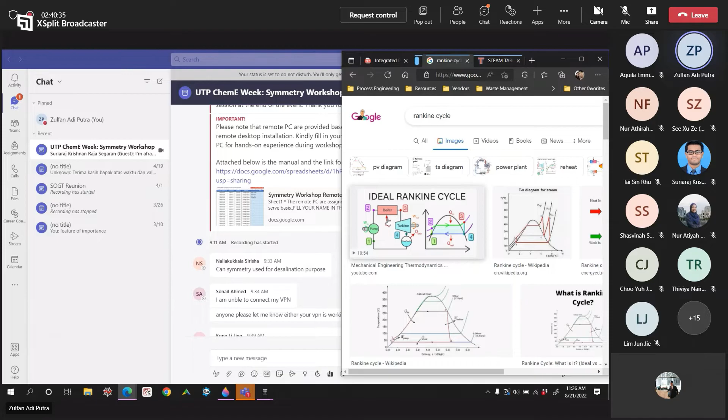Like I showed you what this Rankine cycle is all about, and then from that process, we derive what type of functions that we need to have. So, for example, in this case, where's my... in this case, your Rankine cycle, we need to have something that burns the fuel. Hence, we make this.

What do we burn? We have the fossil fuel - in this case, I put natural gas - and then we have air, and then we define the reactions, and then we extract the energy. So that's this boiler. The whole thing over here with all of the controllers on the air burner is then the boiler basically. So this whole thing is the boiler, and then the steam is this whole line.

So it gets steam. The steam goes to the turbine, and then it goes to the condenser, and then it goes to the pump, and then goes back to the boiler. So this is how you saw it already.

How we model this - understanding the process is very important, very crucial. If we understand it wrong, that means we will then model it wrong, obviously. And then second, we need to know what functions are needed for such a system, for such a cycle.

In short, if you ask can we or can we not, it's always we can. Yes we can, or Malaysia boleh. Um... this one I don't know. I don't know, I don't know.

This one - Suriaraj, do you have an example? Now we have some more minutes for questions. Do you have examples on this? So then we can just simply play around and plug it in so that you understand. Because if I only explain this, maybe you understand it, maybe not, and it's going to be very difficult if you want to do it yourself. So if you have a specific example, just ask me and we can do it now.

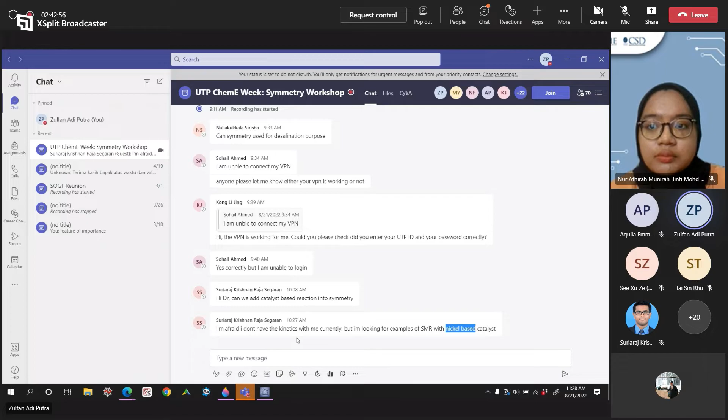Okay, I don't have the kinetics at all. If you don't have the kinetics, then it's a pity. Steam methane reformer is a very well-known process, so you could easily Google this and find the kinetics with whatever catalyst. If you don't find it, that means you have to make an assumption. I don't know why you need a specific nickel-based catalyst, or if this is the only catalyst - this is something I don't know as well. Steam methane reformer.

Yeah, you have it. It's not that difficult, right?

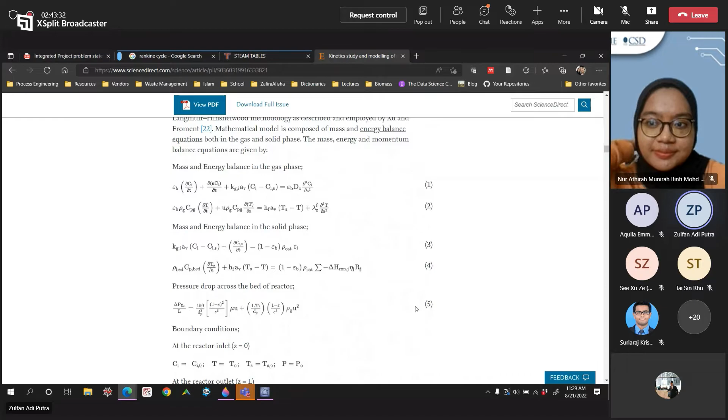Kinetics, all mass balance, energy balance. They have the kinetics - if they don't, that means you have to... oh no, they have the kinetics. CH4 - so in this static example we just get this. It's quite complicated kinetics.

What is this W? Pseudo contact time, residence time. Okay, residence time is easy to calculate. So what is then A1, A2, and A3? Something that we have to take.

It's very easy - reaction parameters. What is the equation here? This one. So A1, A2, and A3. A1, A2, and A3.

Because we need to have the kinetics in terms of that K, and then in terms of this. Okay, this one. What is this? Unit-less term, unit-less term. What kind of term?

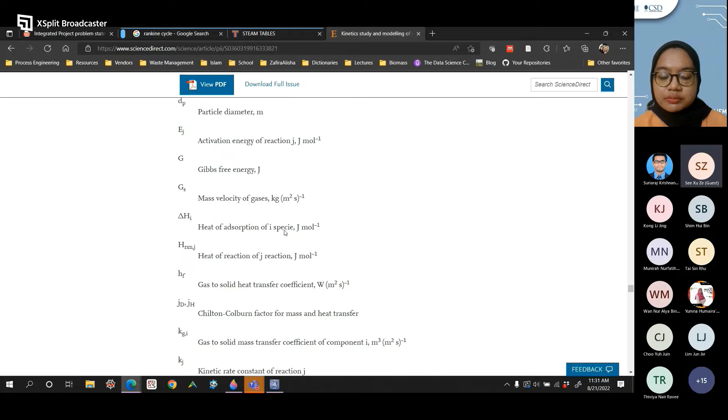Oh, this term - wait. You have the kinetics, so in this case, K. What is K? KCO. KCO is K1 in Roman notation - oh, this one. K1 is this one, K2 is that one, K3 is this multiplied by that, and this guy is over here.

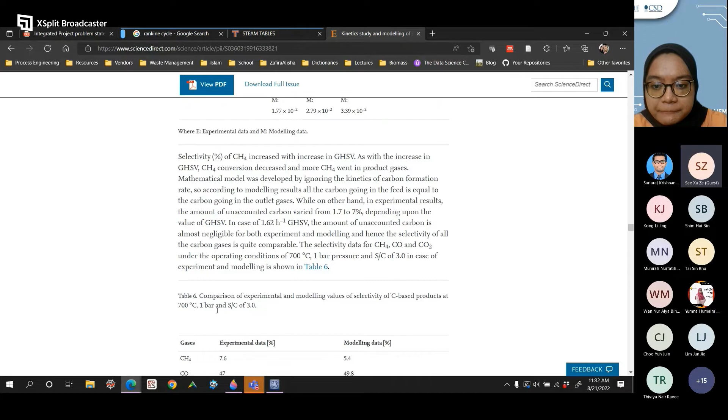The numbers - where's the number? Yeah, see, this is the difficulty. What is this, K0? Complicated papers - it gives the kinetic expressions, but there are no numbers.

What is this? Anyhow, you have to go through the papers for kinetics. You can also do this for simple kinetics, or you could also find something in the textbooks. You have to find the paper, find this paper, and then... no, it's different, it's a different base, but anyhow, I think this base is alumina, rhodium.

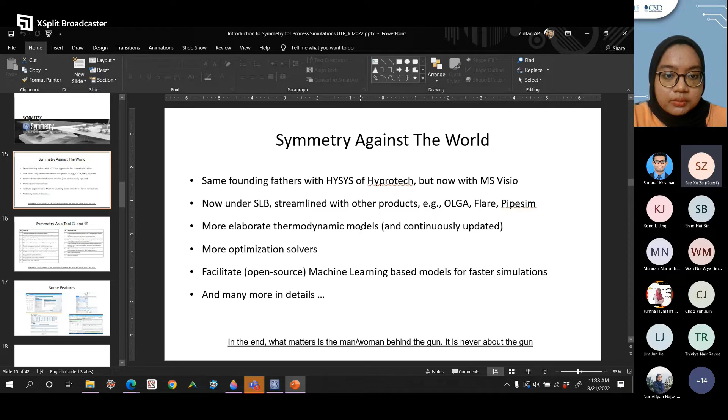And you have a lot more optimization solvers. This is something that final year students or master students doing process optimization can appreciate. If you go to Tools, you have the Optimizer.

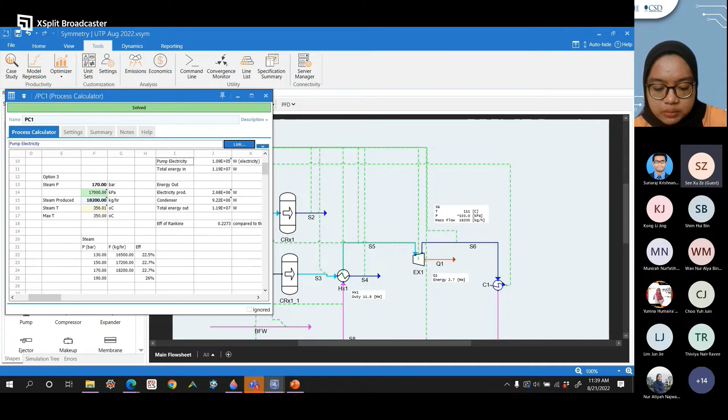We don't have time to do this fully, but for example, if you want to maximize the energy, you can set that as an objective function, and then you have manipulated variables, which are the ones we put in. For example, turbine efficiency, pump efficiencies, steam pressure, steam produced, and so on, along with the constraints.

It will tell us what the optimum numbers are for these bold items so we can maximize the electricity produced. If you run this, there are settings with a bunch of optimizer solvers, as opposed to HYSYS, which only has 3 or 4 to select from.

This is compared to HYSYS and Aspen Plus. So you have a lot more options for the optimization solvers.

And this is what I like a lot now: it has machine learning features built in. I think I showed you at the beginning, which Aspen doesn't have, even though they claim to have it. So in this case...

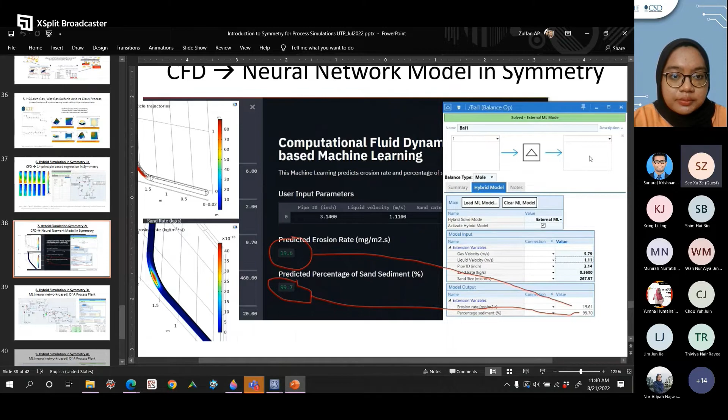As you can see, I can make a neural network model from experiments or from other simulations, and then put that neural network model into this unit operation. This becomes a hybrid of modeling, predicting something that is not conventionally predicted in the first principle model.

In this case, I'm predicting erosion rate. If I have a well or pipeline simulation model as a first principle model, I can put in this unit operation so that I can see how much the erosion rate is at every elbow. This is the hybrid simulation that Symmetry now has.

Another example is what I meant, as I said to you already: you can replace the whole plant with one block, and that's easy to converge.

In this case, because we deploy this on the plant and get data from it on an hourly basis, some of this data cannot converge the simulation because there are 5 recycles in it, so we have to manually key in a new starting point so that it can converge.

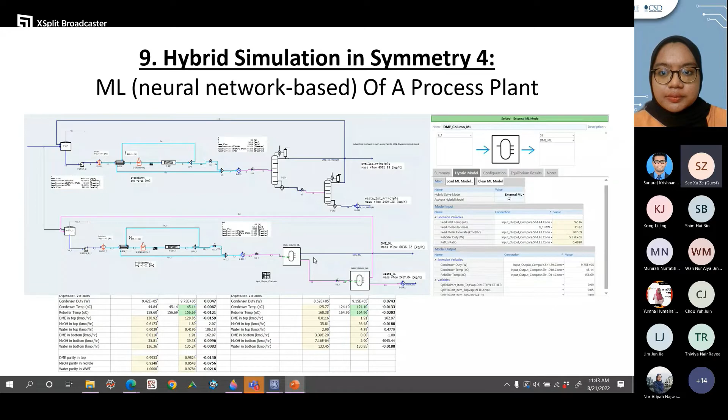Let me know if this is not clear.

What else? I think there are many details, but these are the big things that I think are a plus from Symmetry. Obviously, there's also a minus. So if you go here, I think I mentioned this as well. I need to be able to customize my thermodynamic model. I could do that freely in Aspen Plus, but I couldn't do so very freely in Symmetry. But indeed, the thermodynamic models are continuously updated as opposed to the ones that we have in Aspen.

And then there is no shortcut distillation in Symmetry. We have a shortcut distillation calculation in HYSYS and Aspen Plus. So while it's not necessary, sometimes we need that. And also, we can make our own unit operation in Symmetry, but it is not as easy as if we were to do it in Aspen Plus using Aspen Custom Modeler.

So there are also things that I don't like about Symmetry. Historically, HYSYS and Symmetry are built for oil and gas industries. Features for chemical industries like residue curve map, ternary diagram, azeotrope finder, which are very chemical industry specific, are in Aspen Plus but not in Symmetry. And then you will need to pay a lot more, for extra cost for network piping and so on and so forth. And there's a bug in the pinch analysis tools.

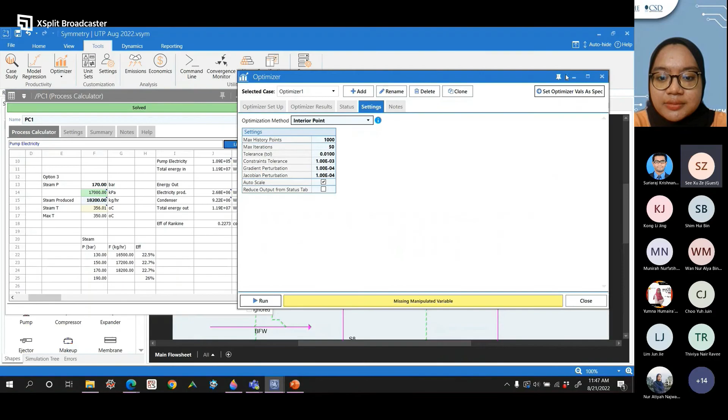So say for example, how do we model a burner? In this particular case, the easiest way to model a burner is this: a reactor, a mixer with the natural gas and air, and then we burn it, put in the kinetics, and then we take the heat out. So basically, this is a burner.

But is there any burner icon here? There is no such thing as a burner icon. So understanding what the functions really is, that's very crucial and important. It's not only related to Symmetry, it is for all kinds of software.

Can Symmetry be used for energy storage? Yeah, like I say, yeah. If the question is can we, the answer would be yes, we can, and Malaysia boleh. So yeah, again, you need to understand.

Number one, you need to make a flow diagram of this system, the energy storage system. If you can make a flow diagram for that and share it here, we can do it in the next 10 minutes or so. Make the flow diagram and then the list of functions related in each of the block diagrams, and then we can make the model accordingly.

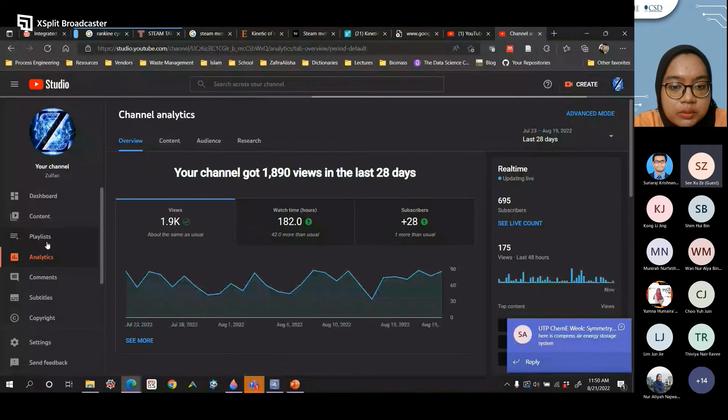So you have a process simulation using Symmetry in this case. So you go here. Well, it's in Bahasa Indonesia, nonetheless, but you could get the idea.

So there are plenty of these sessions, and some of these sessions are about dynamic simulation. I think it's somewhere around 5, yeah. So session 4 or 5 is about dynamic simulation. So you can go here.

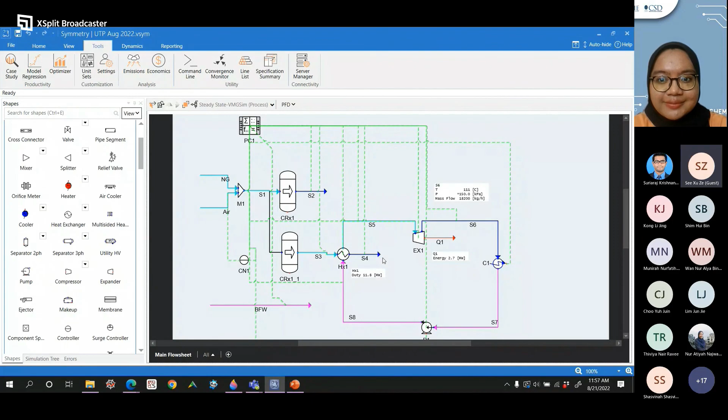No, yeah, good. In all of this, I asked this to Li Jing, what kind of problems do you want to have? Because it will then be better to simulate this with your own problem, like what we just did. So thank you, Li Jing, for that. So now I don't know if you can understand this quickly, but nonetheless it is there, and then you can always visit this. I will maybe share this later with you, so that you can have an idea, and then you can work on it, make this thing better than the one that we have now.

For the other stuff, like this desalination and then the energy storage system, is something that, again, like I mentioned repeatedly already, understand the process first, and then understand the functionalities that are in that process. Then and only then you can model the process in any software, not simply related to symmetry, in any software.

Well, if there's no other questions, then thank you.